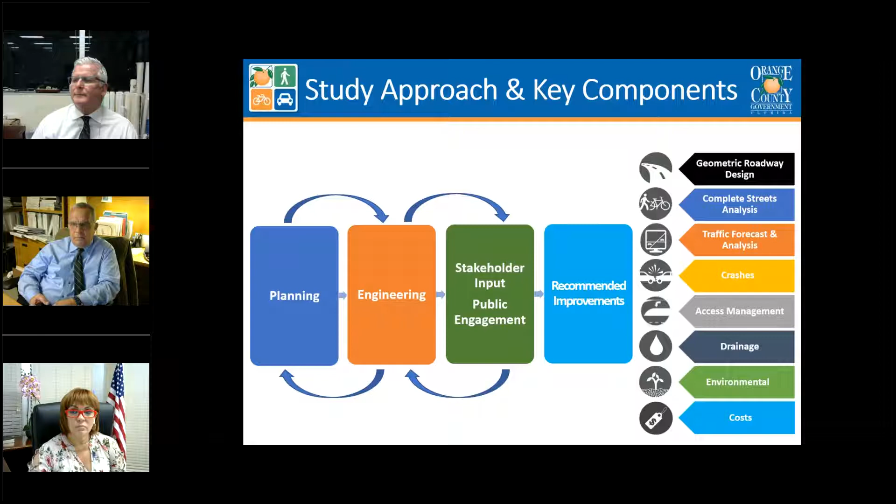The development of alternatives is an iterative process that allows the input from each phase of the process to influence the other phases. The items on the right side of the screen are the engineering and analysis factors that are considered in the study process. Public involvement and input are important aspects of all steps of the project development process.

I'd like to now give an overview of the existing conditions along the project. The items listed on the screen will be addressed, from roadway geometry to crash analysis.

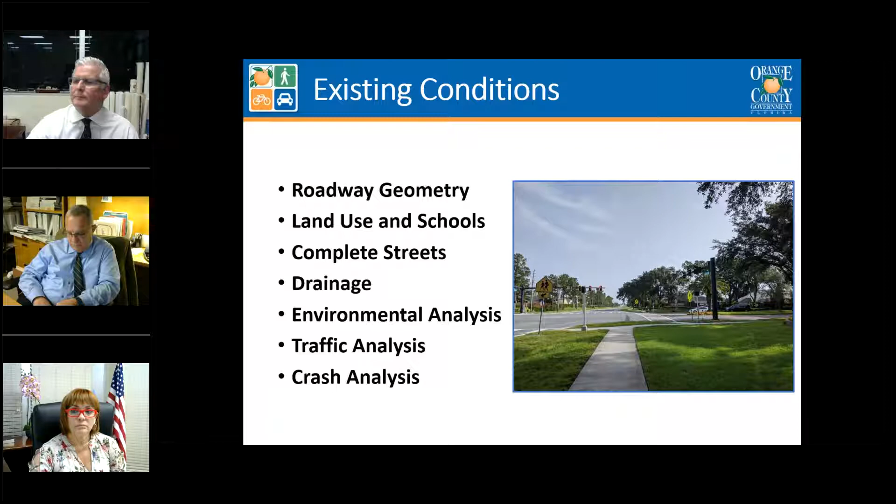Currently, the roadway is a 2-lane, undivided urban roadway with curb and gutter. It is relatively flat, except for the bridge over State Road 408. Turn lanes are provided at most intersections. Near the north end of the project, approaching State Road 50, the roadway widens to 4 lanes. The speed limit is 40 miles per hour for the entire project length.

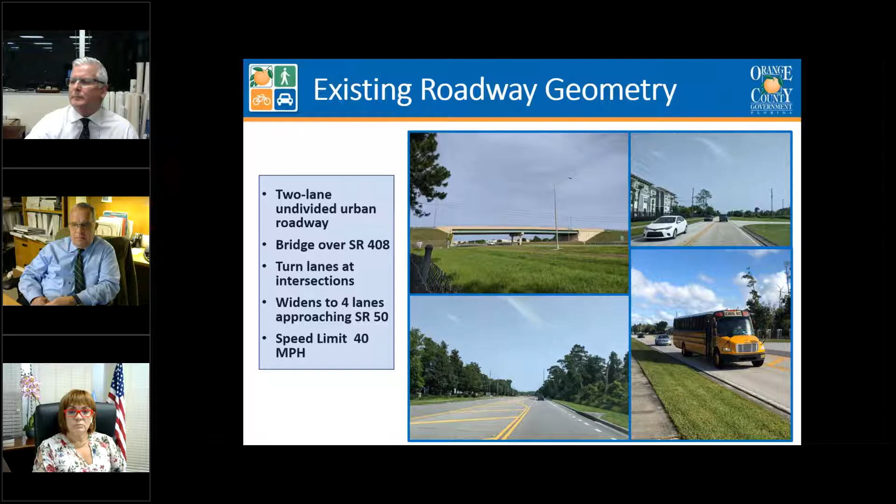Land adjacent to the project is mostly developed, primarily with single-family homes and apartment complexes. There are 2 schools, Waterford Elementary School and Discovery Middle School, located adjacent to the Lake Underhill Road intersection. There are also commercial uses and 3 churches within the project limits.

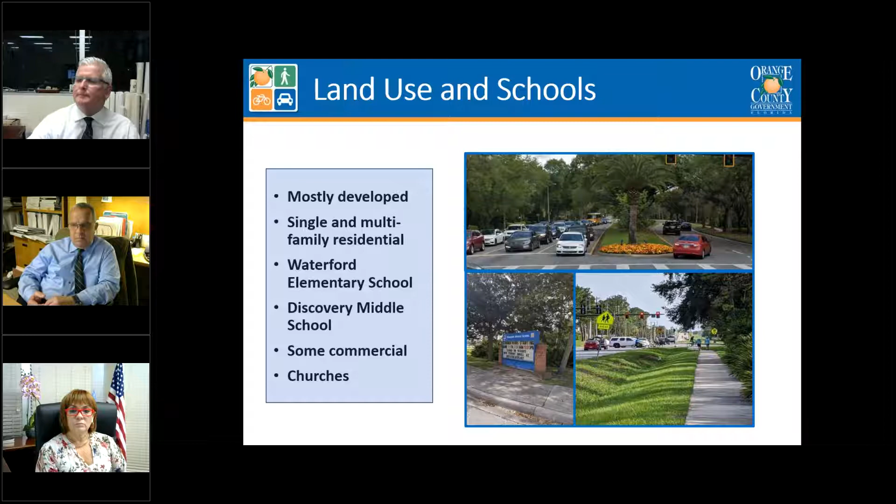A complete street is a street for everyone. It is designed to enable safe access for all users, including pedestrians, bicyclists, motorists, and transit riders of all ages and abilities. Along the project corridor, continuous sidewalk is provided along the west side of the road for pedestrians.

However, sidewalk on the east side is only provided from Waterford Lakes Parkway to Woodbury Cove Drive. Facilities for bicycles are not currently provided, except at the north end of the project where bike lanes currently exist approaching State Road 50. Lynx has 2 bus lines that travel along Woodbury Road between Waterford Lakes Parkway and State Road 50. They are Link 320, the Avalon Park School Connector, which has a stop at Waterford Lakes Parkway, and Neighbor Link 621, which is a flex service route providing curb-to-curb service to Bithlo and Wedgefield.

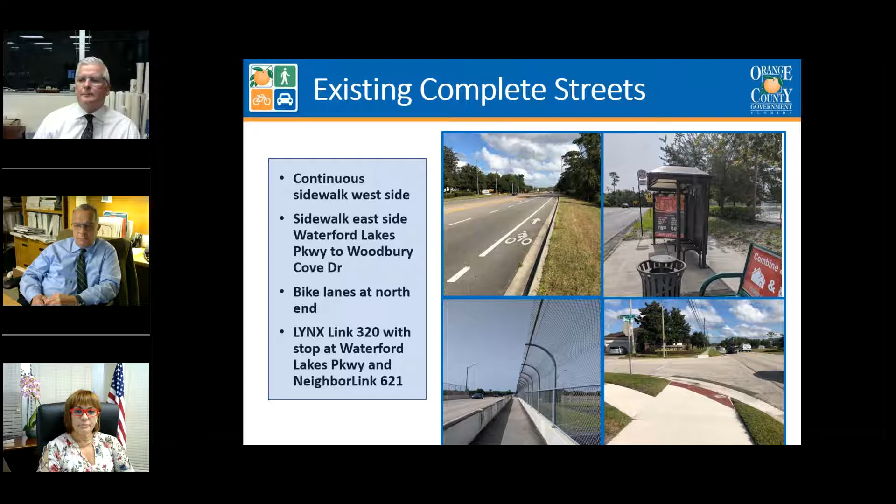The project is located within the Econlockhatchee drainage basin, and water flows east toward the Econlockhatchee River. The project includes 7 primary drainage basins. Treatment and attenuation for drainage from Woodbury Road and adjacent subdivisions is provided through joint-use ponds. Woodbury Road also has a concrete box culvert for an Orange County canal that crosses under Woodbury Road.

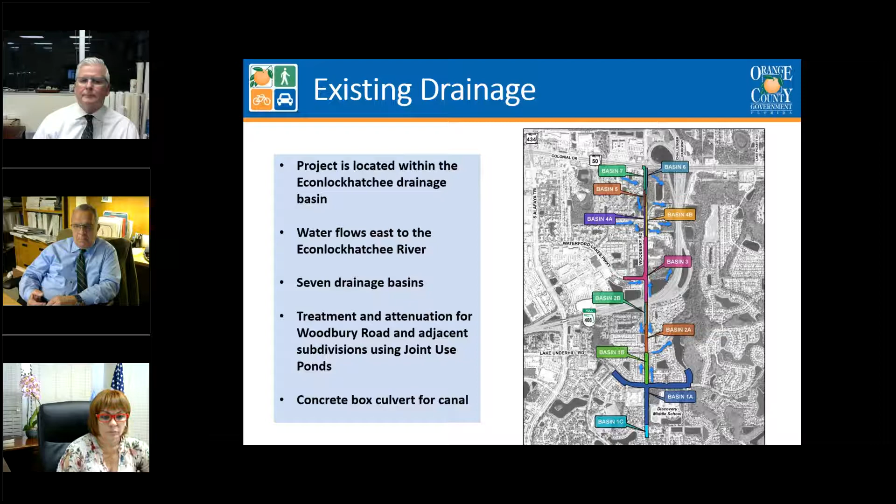The floodplain map shows that the 100-year floodplain touches Woodbury Road just south and east of the Lake Underhill Road intersection, and in the area of the necessary expansion of Pond RET1. The rest of the project is located outside the 100-year floodplain.

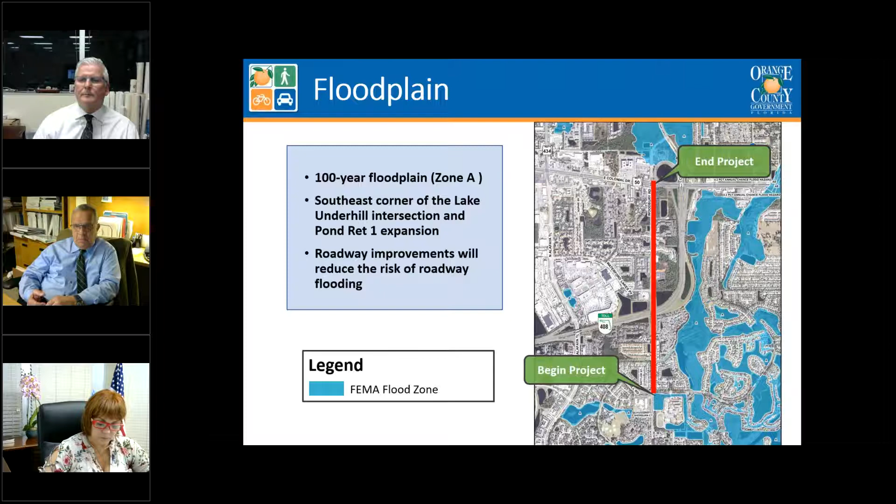An environmental analysis has been conducted for the Woodbury Road corridor. It identified 6 wetland systems and 10 other surface waters within the project corridor. Although there are consultation areas for 3 species within the project limits, the Florida scrub jay, the red-cockaded woodpecker, and Audubon's crested caracara, they are not anticipated to be found within the corridor.

Wading birds such as the wood stork, roseate spoonbill, tricolored heron, and the little blue heron, as well as the American alligator, are protected wildlife species that have the potential for being observed within or immediately adjacent to the project. No protected species or significant habitat were identified during site reviews. Wildlife crossings are not proposed due to the existing development and lack of undeveloped habitat along both sides of Woodbury Road. The project was reviewed for cultural resources and no historic buildings or archaeological sites were identified.

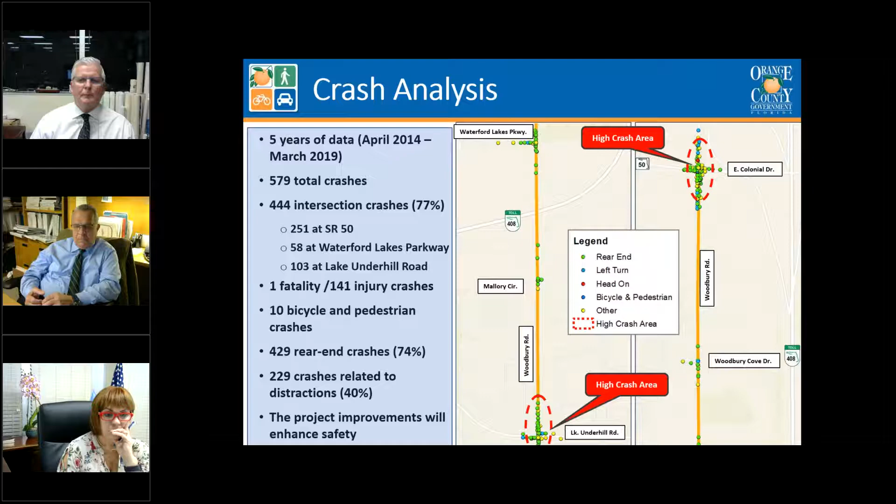The existing traffic volumes along Woodbury Road range from 11,900 vehicles per day south of Lake Underhill Road to 21,000 vehicles per day south of State Road 50. This results in a level of service F, which is failing within the entire project limits. The county standard is a level of service E.

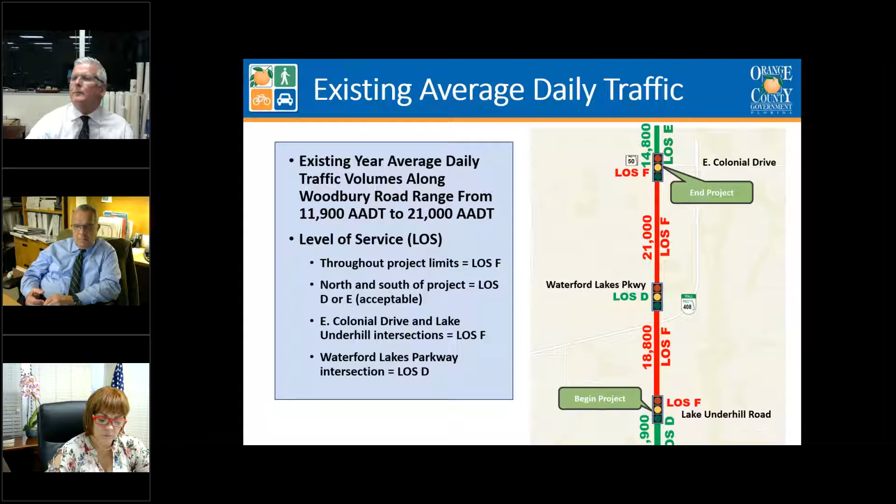The design year 2047 traffic is projected to range from 19,000 vehicles per day south of Lake Underhill Road to 28,700 vehicles per day south of State Road 50. If Woodbury Road is not widened to 4 lanes, both the roadway and all intersections will fail in the design year. Therefore, Woodbury Road needs to be widened to provide needed capacity.

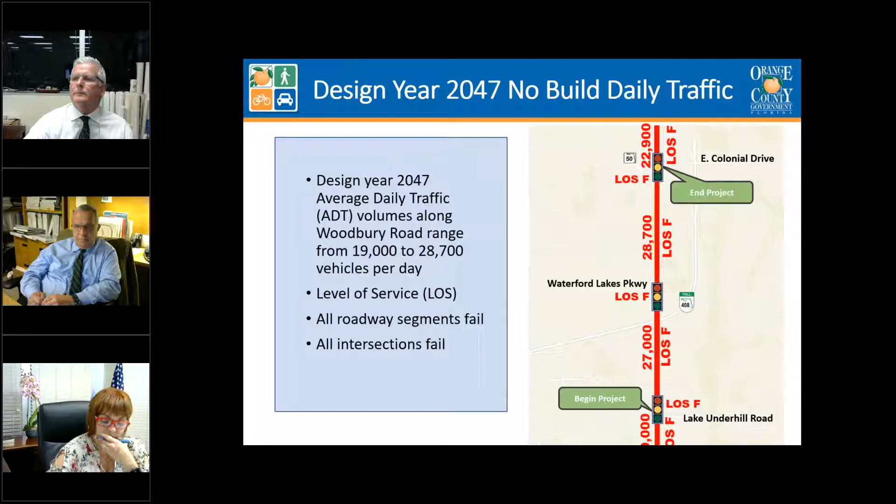We evaluated several alternatives to address the traffic and safety issues on the project. In addition to the no build or do nothing option, we considered minor transportation systems management and operation improvements. The no build and the option to make minor operations improvements will not satisfy the future traffic needs along Woodbury Road. Therefore, we evaluated 3 4-lane widening build alternatives.

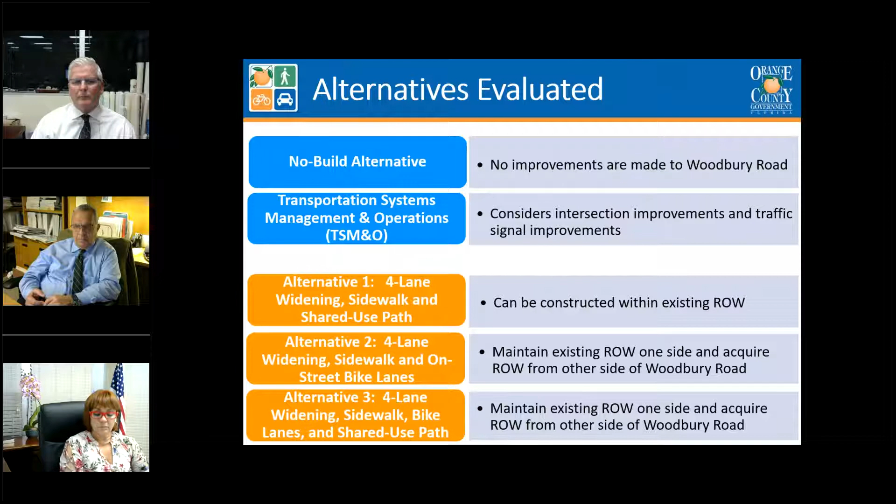Build alternative 1 includes a sidewalk and shared use path, but no on-street bike lanes. Alternative 2 includes sidewalks and on-street bike lanes. And alternative 3 includes everything: a sidewalk on one side, a shared use path on the other side, and on-street bike lanes.

We did a survey, and now I'll give you an overview of the results of the survey that was offered during the first public meeting. Detailed results are available on the project website.

Starting with accommodations for people riding bikes, the survey results showed that people generally feel unsafe riding a bike along Woodbury Road. People also much preferred bikes sharing an off-road path with pedestrians than having bicyclists riding in the on-street bike lane. When asked what would make you feel safer riding a bike along Woodbury Road, the top 2 answers were having bicycles separated on a path and having a shared use path. Better roadway lighting was the third selected option.

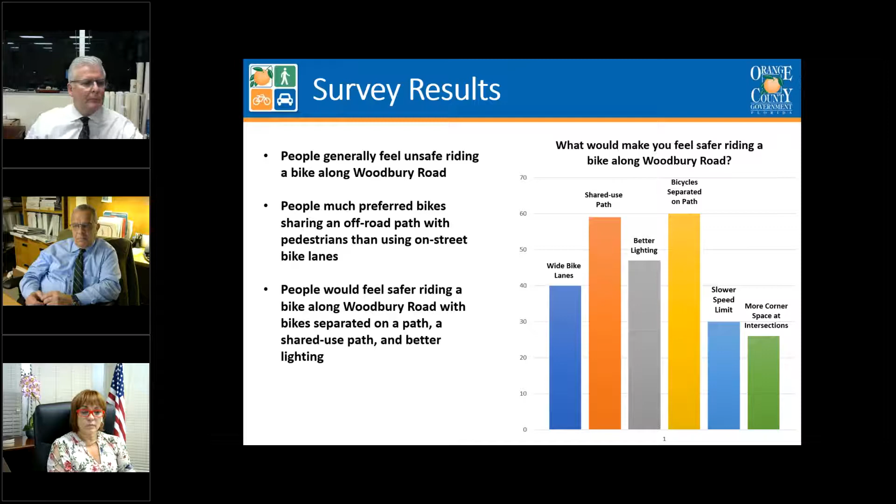For those walking, the survey indicated people feel more safe walking than they do biking along Woodbury Road. They favored more pedestrian safety features at the Lake Underhill Road intersection. And when asked what would make you feel safer walking along Woodbury Road, wider sidewalks, better lighting, and a shared use path were the top 3 responses.

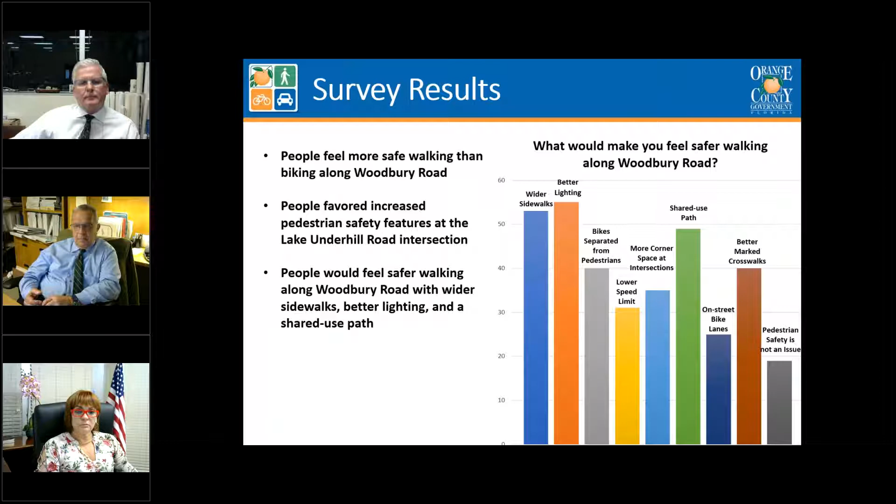For drivers, the survey results showed that people are experiencing traffic congestion in both the morning and afternoon peak periods. And people think that adding roadway lanes, adding turn lanes at intersections, and improving signal timing would help to relieve traffic. The top 2 responses to the question on what could be done to improve safety on Woodbury Road are adding turn lanes at intersections and adding lanes and a raised median.

Most people think the current speed limit of 40 miles per hour is just right, and most people strongly prefer that a median be constructed to control access.

And lastly, each of the 3 build alternatives plus the no build alternative were rated by survey takers. Alternative 1, the preferred alternative, had the highest average rating of all alternatives. Alternative 1 had a wide sidewalk on one side of the road and a shared use path on the other. Alternative 3, which had a wide sidewalk, a shared use path, and bike lanes, was the second ranked alternative. The alternative with sidewalks and wide bike lanes, no shared use path, was ranked 3rd, and the no build alternative was ranked last.

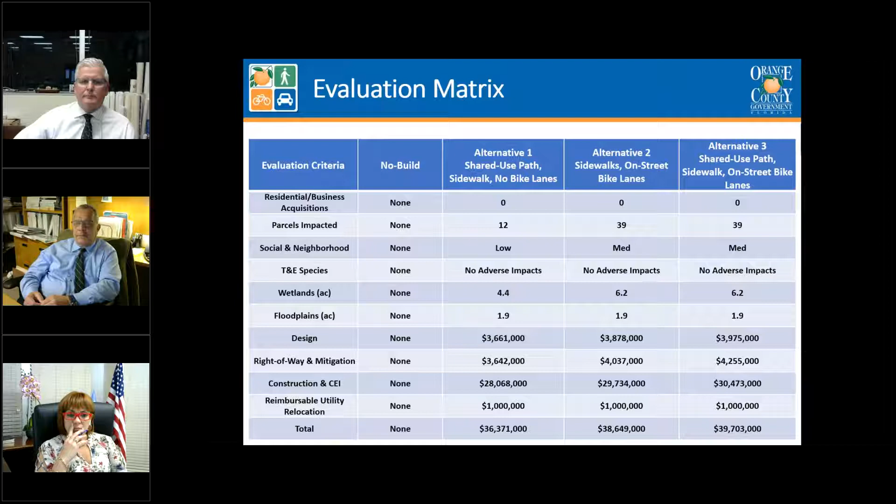Impacts and cost for the no build and 3 build alternatives were determined. Alternative 1 is the preferred alternative. It has the lowest overall cost and impacts the fewest number of residents and business parcels, while still providing needed capacity and multimodal features for pedestrians and bicyclists.

The preferred alternative consists of 4 11-foot travel lanes separated by a 15.5-foot median, a 6-foot sidewalk on one side of the road, and a 10-foot shared use path on the other.

This alternative can be constructed within existing right-of-way except near the Lake Underhill Road and State Road 50 intersections, and requires the least right-of-way of all three build alternatives. It improves mobility for people walking and biking compared to existing conditions, and it minimizes stormwater runoff and the need for additional ponds, and has the lowest construction cost of the three build alternatives.

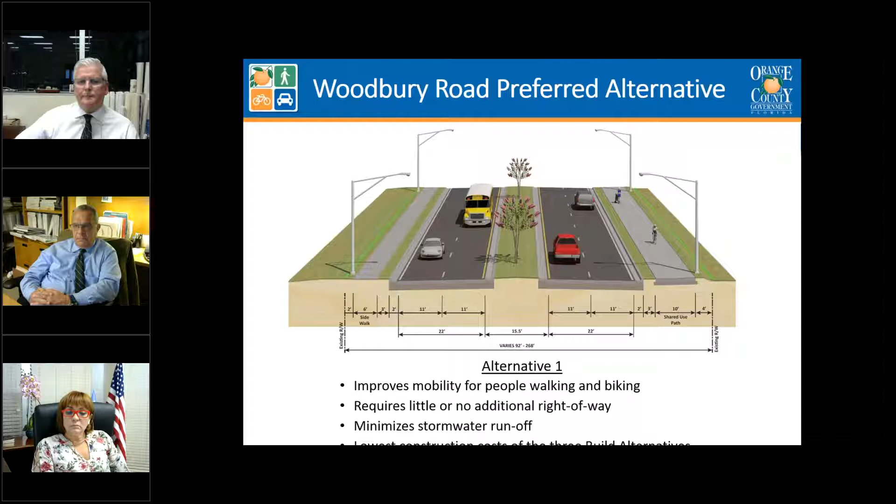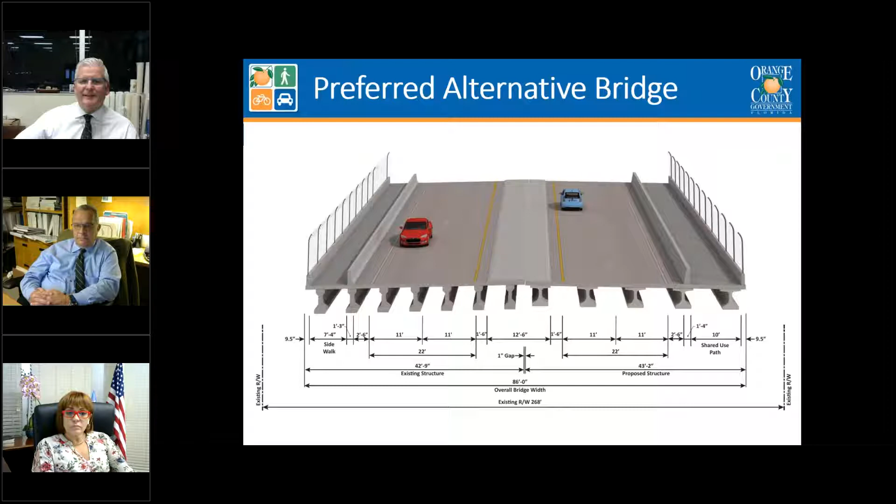We just briefly saw the bridge there. We'll also be widening the bridge. This is what the bridge over State Road 408 would look like with the preferred alternative.

This is what the improved roadway would look like just north of the Lake Underhill Road intersection, looking south at the intersection.

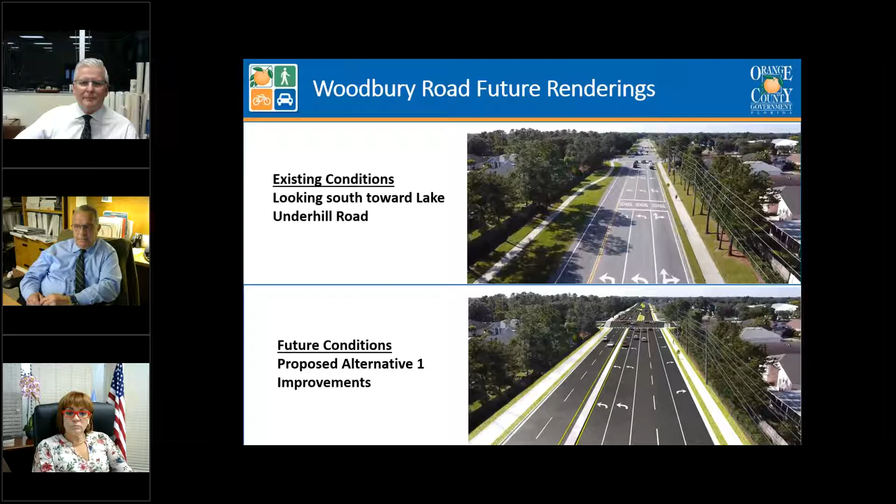Here's another view of what the improved Woodbury Road would look like north of Waterford Lakes Parkway, looking north.

The proposed improvements at the intersection of Woodbury Road and Lake Underhill Road are a balancing act to provide the capacity that is needed to serve the high volumes of traffic that travel through this intersection with a high number of students that cross this intersection on their way to school each day.

Proposed intersection capacity improvements include adding right turn lanes northbound, southbound, and westbound, and adding a second left turn lane for the eastbound to northbound Woodbury Road movement. Improvements also include extending turn lanes so there is sufficient room to store vehicles waiting to turn. In order to maintain safety for the many students that cross here, we also propose that the signal continue to stop vehicles in all directions to allow students to cross the intersection without any conflict from cars.

The proposed improvements at the intersection of Woodbury Road and East Colonial Drive include adding a second left turn lane and a right turn lane northbound. The traffic analysis has also identified the need for a second right turn lane on Colonial Drive for the westbound to northbound movement. This improvement will not be constructed as part of this project, but will be recommended to the Florida Department of Transportation since Colonial Drive is a state road.

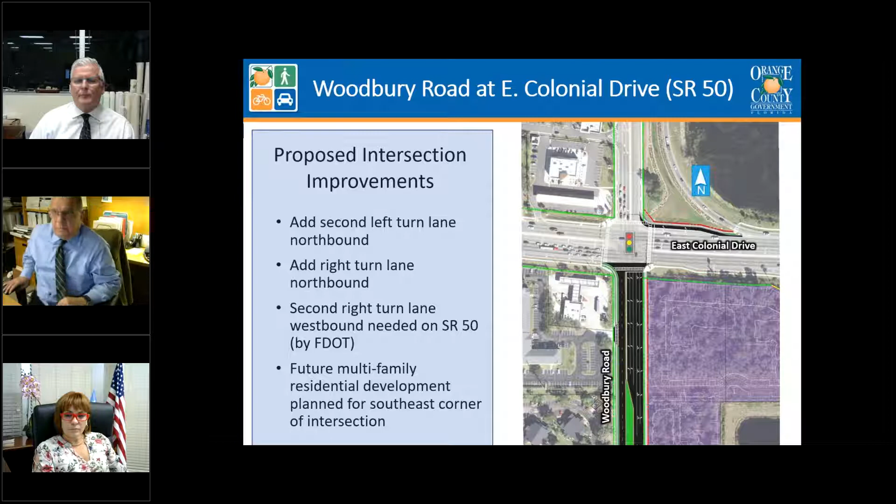The slide also shows a proposed multifamily residential development that is planned for the southeast corner of the intersection. Two options are proposed to address the proposed planned development. The preferred alternative, management concept 1A, in the area south of East Colonial Drive is shown here and includes a northbound directional median opening at the Polos East Apartments.

A second option is being presented for this area that includes a full median opening at the unnamed road where a traffic signal would be added. This option is only viable if traffic signal warrants justify the installation of a traffic signal at this location. The northbound directional median opening for the Polos East Apartments would also be included with this concept.

Public engagement is a very important part of the project. Your opinions and thoughts help formulate the best solution. We utilize newsletters, a project website, meetings such as this, and smaller groups or individual meetings as requested. Public hearings will also be heard before the local planning agency and Board of County Commissioners.

In hearing about the corridor alternatives and the potential need for additional right-of-way, you might ask, how do I know if my property is impacted? Well, first, the county reviews citizen feedback received from the public meetings and other methods like the website comment form and survey form given in the first public meeting.

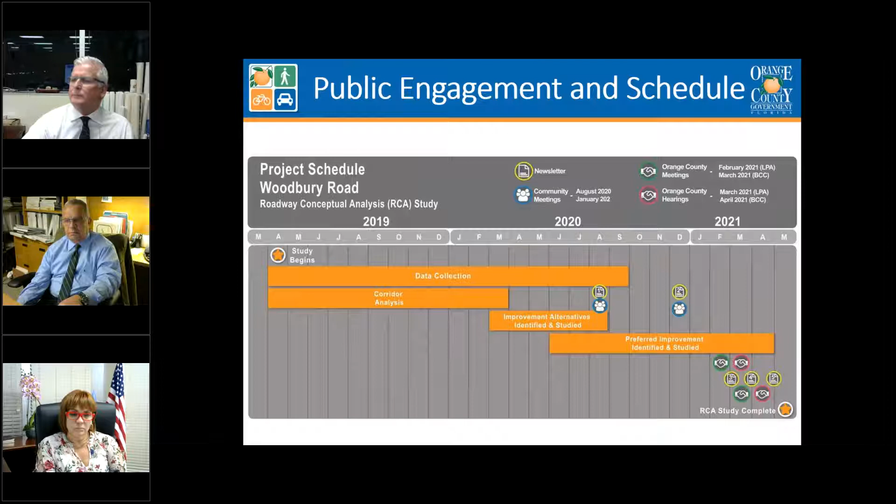The project began in April 2019 and is expected to be completed by May of next year. We held the first community meeting in August of this year, and tonight is the second community meeting. We will then bring the recommendations to the LPA and Board of County Commissioners for final approval at meetings over the next few months.

My contact information and the contact information of David Dangle, the consultant project manager, are both shown here, along with the website address.

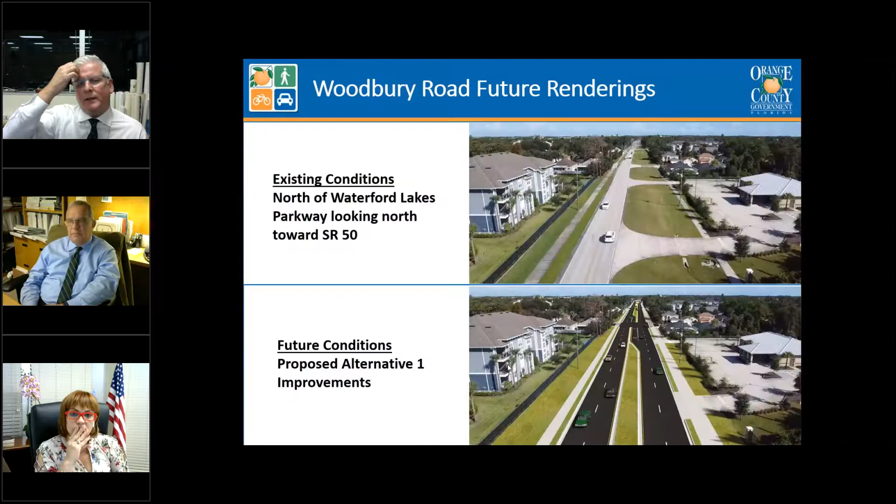Maybe you can bring back the slide with the pond sites. Yeah, I can just say that the main pond in the middle of Waterford Cove is not going to be affected. The one to the east side, along the back of the neighborhood next to the wetland, that's the one we are looking to expand slightly into the wetland because of the additional lanes at the Lake Underhill Woodbury Road intersection. So there will be some changes on the backside of the cove. Of course, we're working with all the permitting agencies. We'll have scientists and biologists looking at this throughout the design and construction, and we take every precaution necessary.

Will there be markings in the shared use path to help prevent issues between bike riders and pedestrians? We typically do not stripe a shared use path.

If we see that there's an issue, typically there'll be a separator marker, pavement marker, at intersections to help channelize the flow both northbound and southbound. But we're going to monitor that after construction, and continue to monitor it. I'm sure we'll get phone calls if there are issues - the Commissioner's office will get phone calls, emails - so we'll monitor that and make sure. But there's plenty of things we can do if something like that begins to occur.

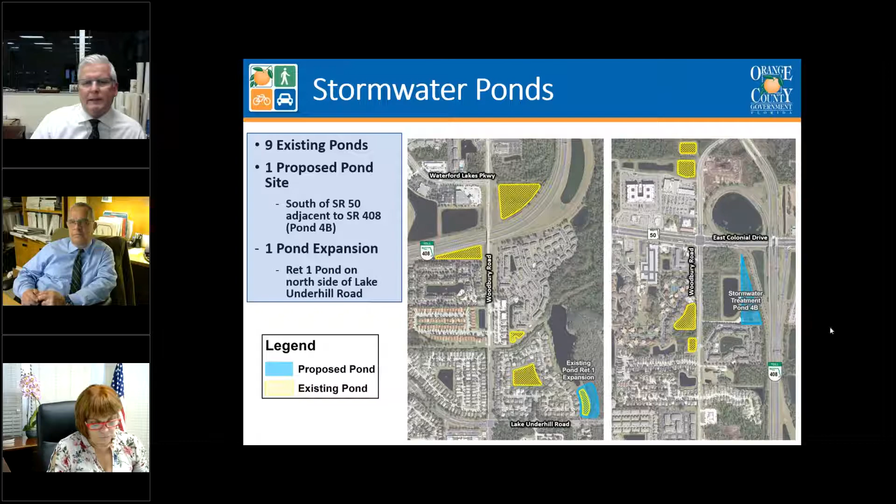We don't really have a graphic of the entire project limit, but a majority of the right-of-way needed is right at the Lake Underhill Road intersection. And then there is a little bit at the State Road 50 intersection that will be from the east side of the road where that planned development is coming in. There's not really a need for additional right-of-way north of Lake Underhill Road or south of State Road 50.

We were very fortunate with this project that back in the 90s, the leadership at the county, when Huckleberry was being developed and Waterford and all of these projects along here, that additional road right-of-way was provided through development exaction. So by and large, the main line right-of-way for the road has been in place since then, and now we're benefiting greatly by coming back and utilizing that land. We did show a couple of alternatives that would have to exceed that, but I think the one that was recommended is really the sweet spot for this project.

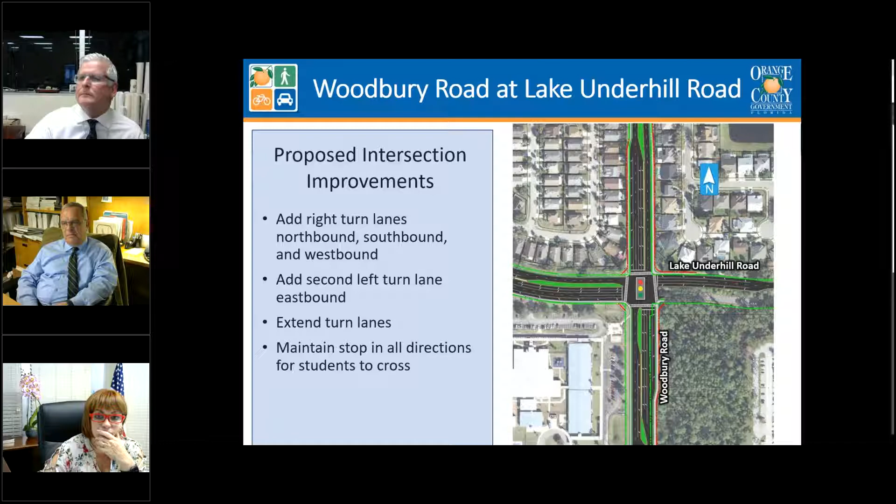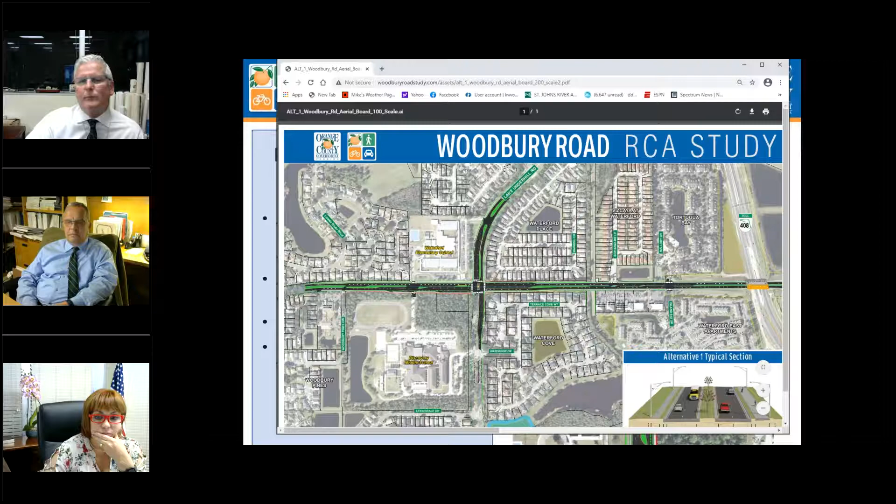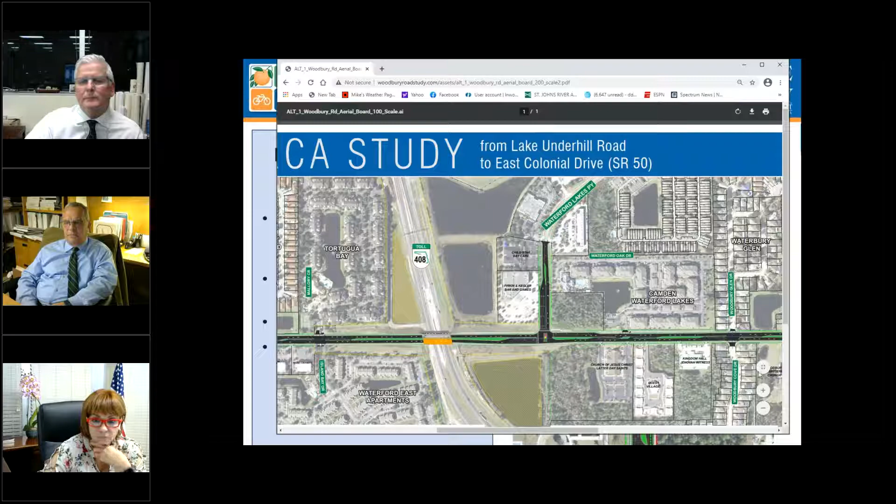Okay, let me see, I've got it pulled up. Yep, we can see it. I just need to figure out how I can scroll over and zoom in. So Quest Village is kind of above the bridge typical section, Brian.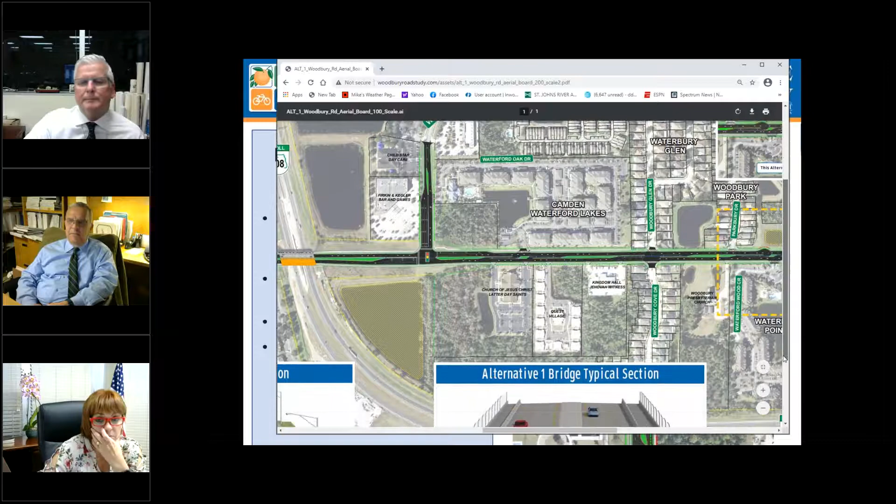Is that helping? Can you see that? Yeah, that's helping.

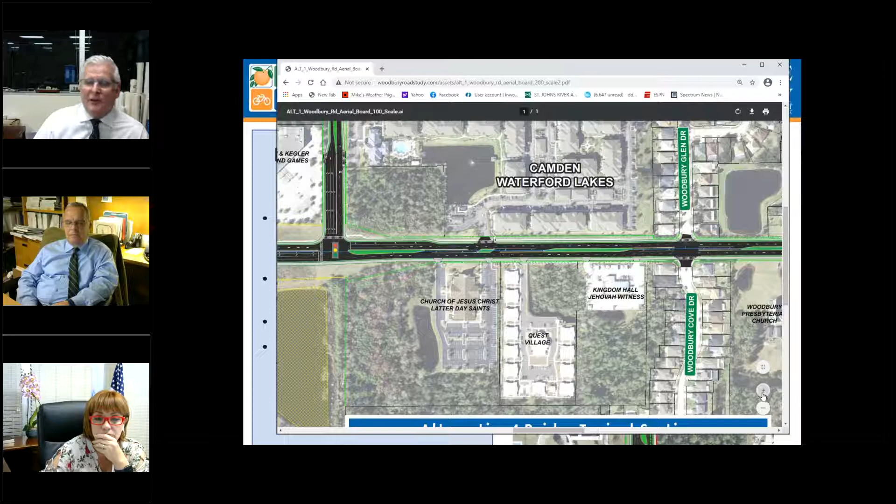Mid-block crossings need to be evaluated on a case-by-case basis. You really need to be able to demonstrate that you have a good solid stream of pedestrians and bicyclists crossing at those locations. We will monitor that post-construction to see if travel patterns change, and you can be our eyes out on the road as well.

Let us know if you're seeing an increase in that kind of crossing. Just south, there'll be a traffic signal, which will also offer the ability to cross the road. So for that one, this is going to be a monitoring issue. And of course, we're going to complete the pedestrian paths on both the east side and west side for the entire length of the project.

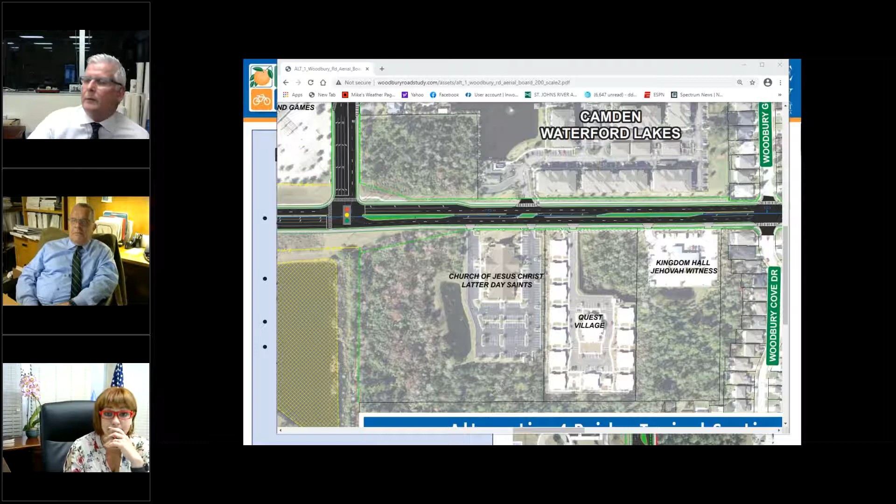The last question was, will any type of privacy barrier be installed for our closest buildings to Woodbury Road? The county has a screen wall policy, however it is focused on platted subdivisions. So the answer would be no in the case of Quest Village. That would not apply.

We have another question regarding the survey from the previous meeting. Will you consider sending a secondary survey for those that didn't get a chance to attend or participate? We can take your input through the project website. There is a place on the website for you to provide more information and comments.

Do we have the survey posted, or will we have the survey posted, David? The survey is posted. So you can see the survey, you can see the questions, you can see the direction of questioning that we had out there, and you can provide your input and comments in that manner.

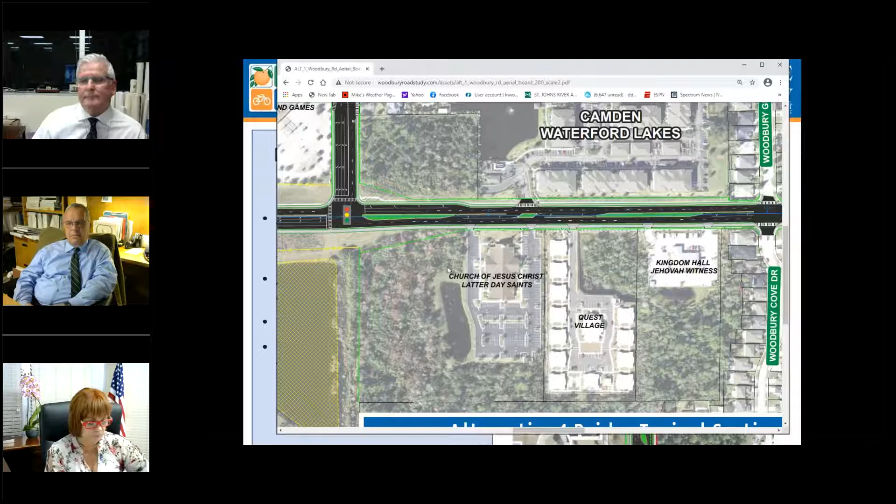What will be the number of lanes in each direction at Woodbury and Lake Underhill? Please include crossover and turn lanes. Okay, can you zoom in there, Dave?

North is to the right in this case, so you'll have 2 travel lanes in all directions. Southbound, you'll have a dedicated right turn lane and 2 dedicated left turn lanes. Same way northbound, 2 lanes through, 2 lanes left turn, 1 lane right turn. Eastbound, pretty much the same thing, 2 lanes through, 1 right turn lane, 2 left turn lanes.

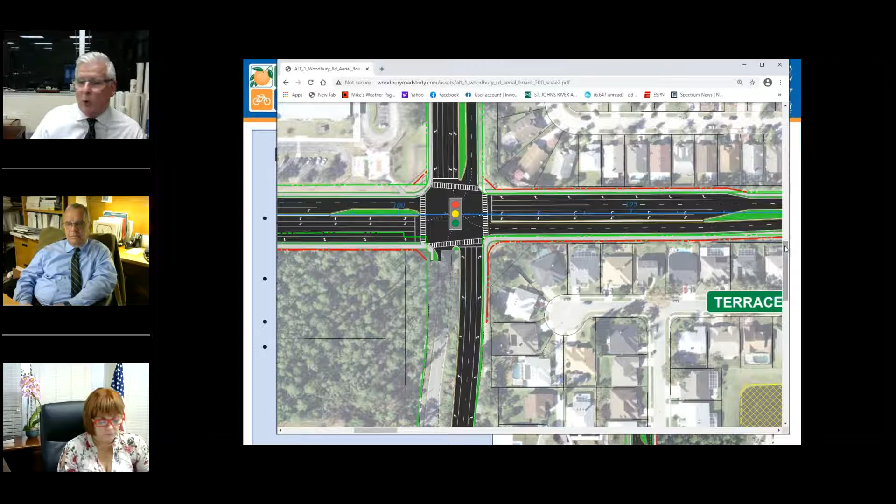In the other direction, we don't have a dual left. We have a single left, a single right, and 2 throughs. And that's all based off of the projections from the traffic analysis conducted for this project. I'd like to note that traffic analysis was pre-COVID, so we had some good information to go off of.

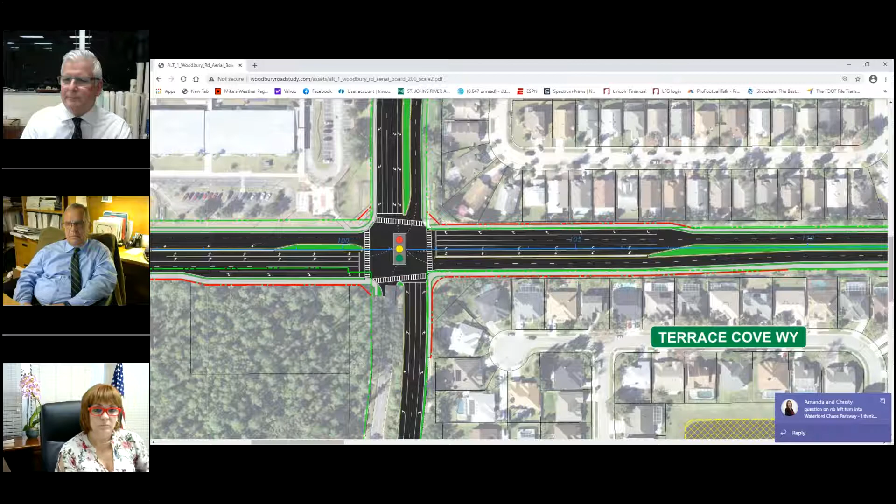Will the existing underground utilities have to be moved? This is the area behind Waterford Cove. These utilities were installed when the county installed the reclaimed water pipe several years back. Dave, you want to take that?

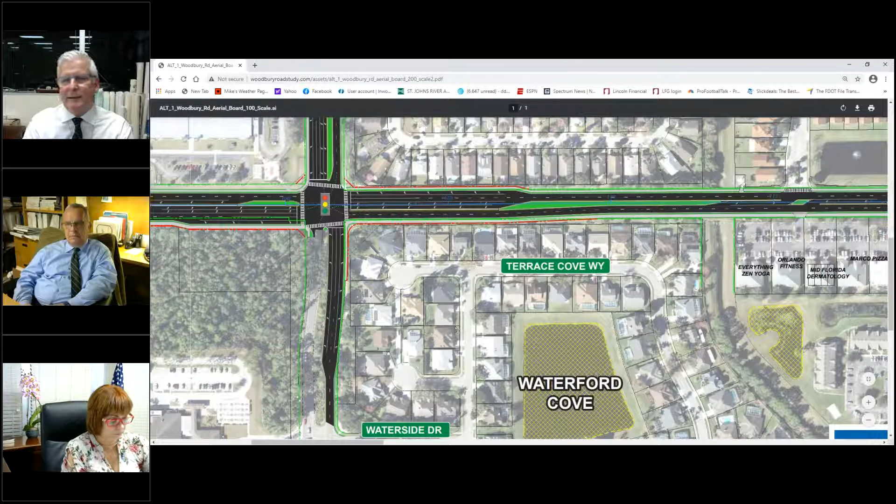I'm not specifically sure where they're talking about behind Waterford Cove. There is the potential for some utility conflicts within the existing road right-of-way, but that kind of detail on whether they will need to be relocated or not will be determined during the design phase that Renzo mentioned earlier, where you get into a lot more details at that point. I'm not sure if that specifically answers the question about Waterford Cove.

That was the whole exercise the first time around. But as we go into the design phase, where we have the vertical information for all the utilities and for all of our pipes that are going to be needed for drainage, we'll know for sure then. But we're pretty confident right now.

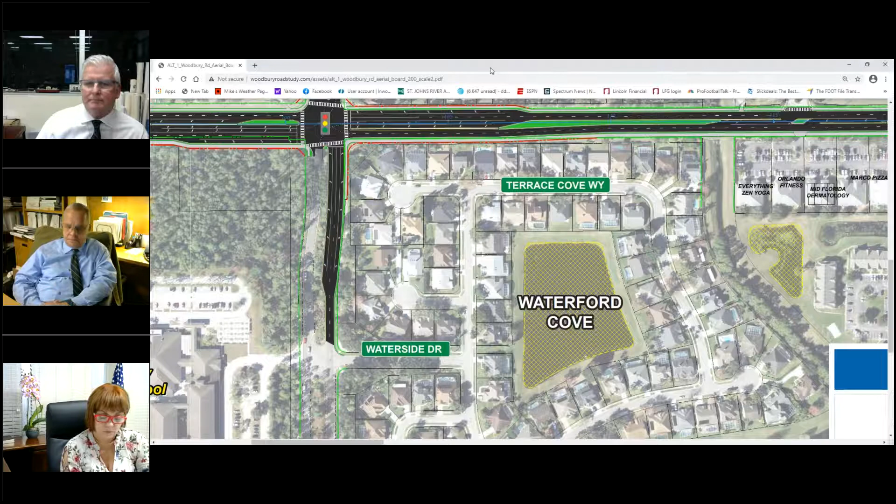One of the most important things is minimizing impact, particularly to residential properties. And it does minimize the impact better than alternative 2 or alternative 3. That was a significant consideration.

Just to add to that, I want to assure the public and those participating in this meeting that the local planning agency, also known as the LPA, affords you the ability to participate and voice your preferences and concerns regarding this project. There'll be a second opportunity during the Board of County Commissioners presentation. What you're seeing this evening is the recommendation that staff will put forward for the board's consideration and approval of this concept, so that we can move into the design phase.

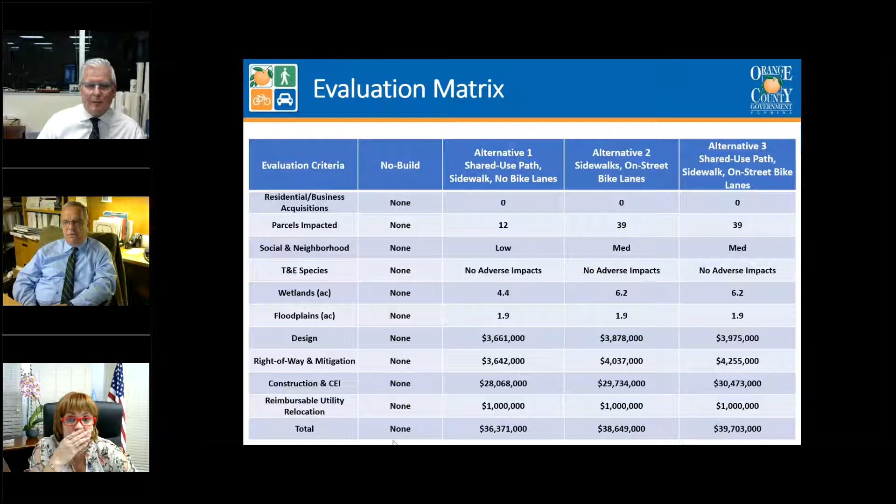I just want to make it clear that this is not your last opportunity to voice your opinion. There are two public hearings scheduled, and you are more than welcome to participate in those events. We will send a newsletter before each hearing, advertise in the newspaper for those who don't get newsletters, and place the information on the project website. Please keep in touch, and call any of the contact people, and we'll be happy to share dates and times with you.

What is the plan for Woodbury Road south of Lake Underhill, between the side entrance to Waterford Elementary and the entrance to Discovery Middle? Will two through lanes be added in addition to a right turn only lane headed south into the Eastwood neighborhood?

Brian, this is David. The graphic on the screen shows the lanes being proposed. I know we've heard concern about carrying the two lanes south of the Lake Underhill Road intersection, but they're needed to help that intersection operate efficiently. If we have two through lanes coming south to Lake Underhill Road, we can't just get rid of one and only have one continue through to the south. The intersection won't function at a high enough level of service in the future. Same way heading northbound, we need to establish the second northbound through lane in addition to the other turn lanes to help the intersection operate efficiently.

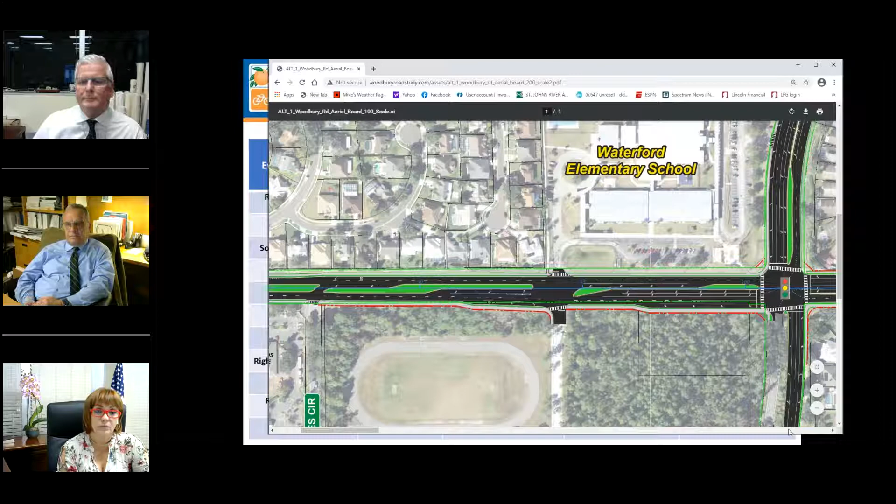We've also had a couple of meetings with the school board staff, and they requested some additional turn lanes and lengthening of existing turn lanes shown on the concept. You can see there's a new northbound right turn lane into Discovery Middle School. The southbound left on Woodbury into Discovery Middle School is about as long as we can make it because of the proximity to Lake Underhill Road. We've also included a northbound left into the Waterford Elementary School intersection off of Woodbury Road.

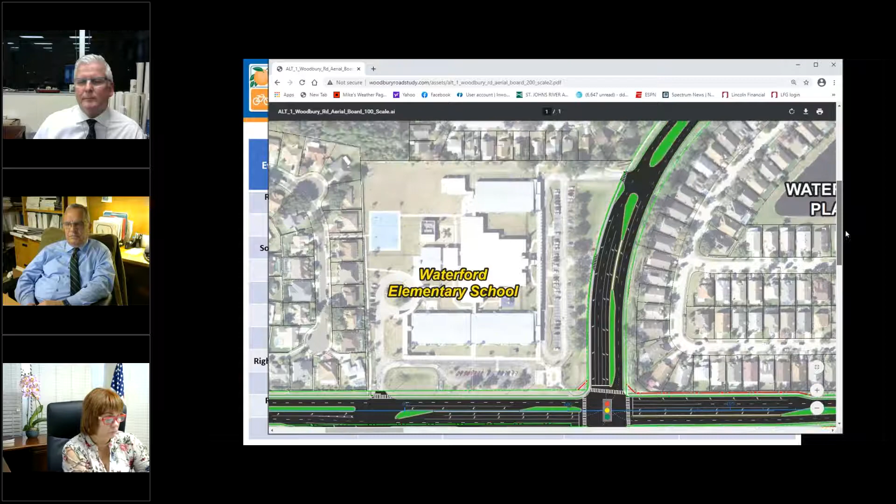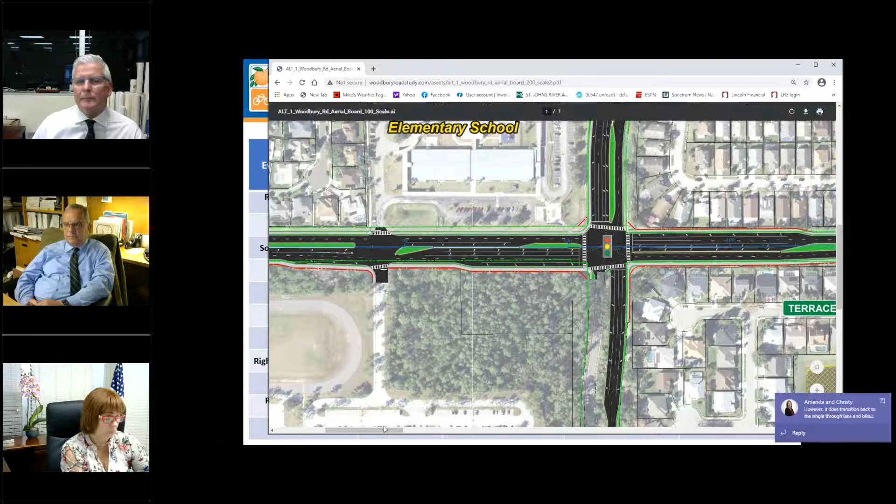And then on Lake Underhill Road, again, we have extended the left turn lane into Waterford Elementary in that area. So that's what we've got proposed in this area. You can see that we are transitioning back to the single lane once we get far enough south of Lake Underhill Road, in each direction through this area.

David, did we cover adding turn lanes headed south into the Eastwood neighborhood? Will two through lanes be added in addition to a right-only turn lane headed south into the Eastwood neighborhood? No, we don't have any additional right turn lanes proposed. We just have the two through lanes carried through Lake Underhill heading southbound, and then the outside lane will merge so that we have a single lane once we get just past the kids' daycare in that area.

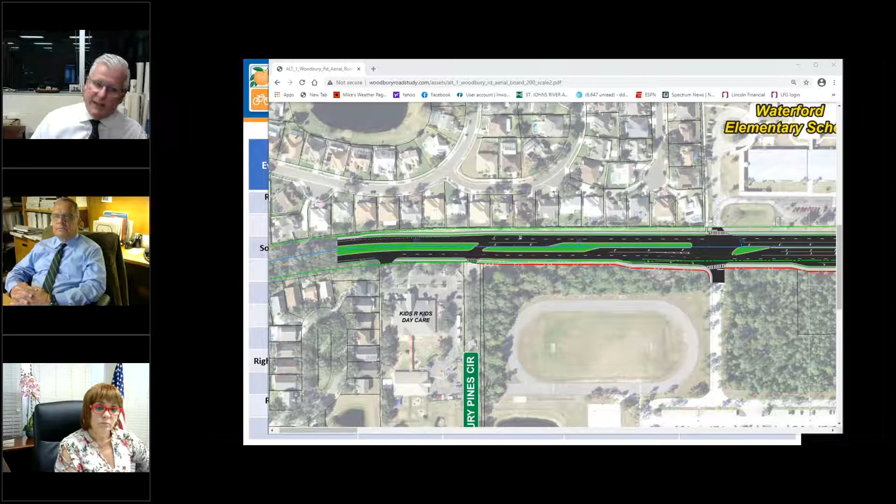We actually went further than what the scope of the project was, but in order for that intersection to function properly, like David said, we extended further than where we had anticipated to begin with.

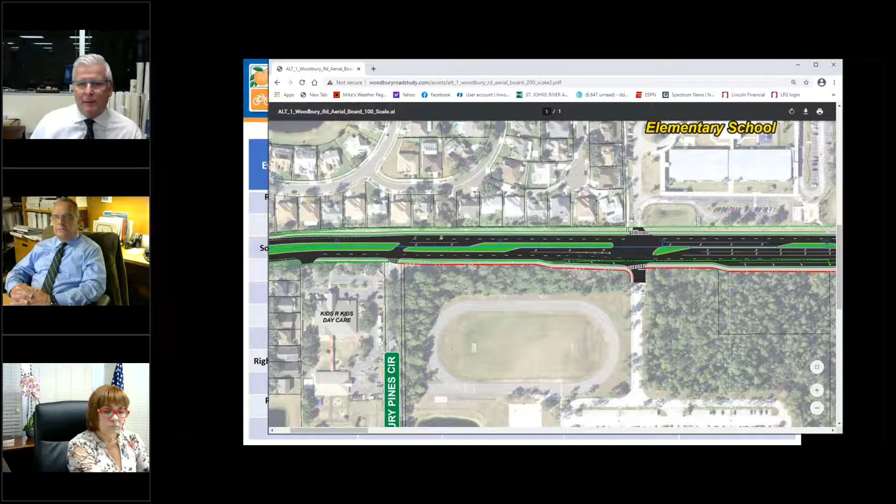I think we just answered this one again, but: where would those two straight lanes merge into one before the beginning of Eastwood near the entrance to Woodbury Pines / Kids R Kids? It's up on the screen. Pretty much that driveway is the point of transition. We developed the second northbound lane just south of Woodbury Pines Circle, heading northbound.

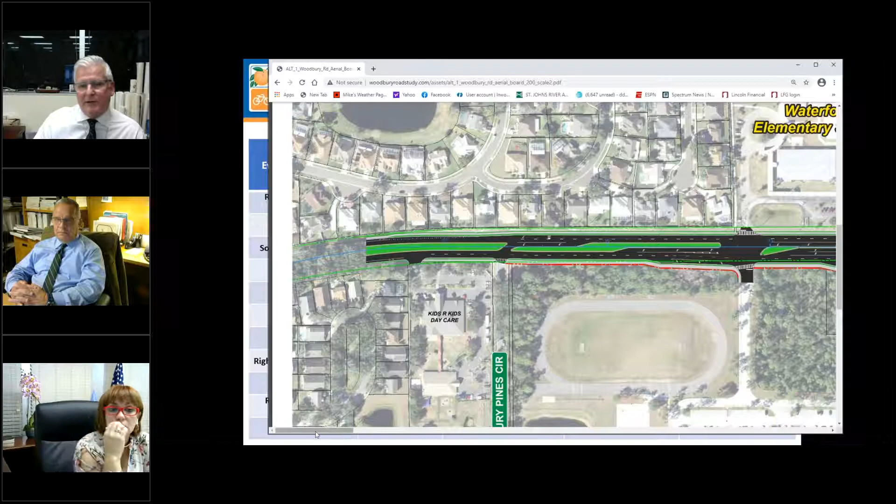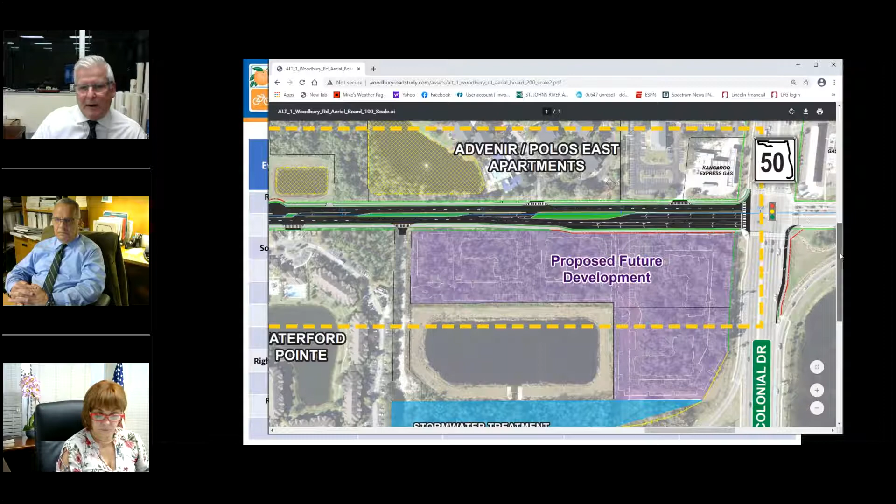Are any additional traffic lights planned? Entering Woodbury Road from side streets is already difficult. As Blanche had shown, there's an optional traffic signal at the north end of the project. There's an unnamed cul-de-sac up there that has the potential to warrant a traffic signal. So depending on those signal warrants, there might be a new traffic signal at that location.

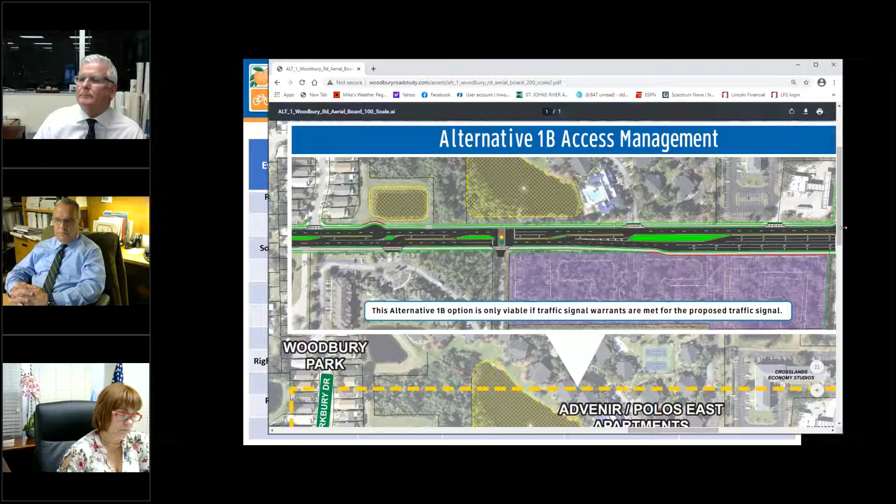Is the portion of Woodbury Road south of Lake Underhill Road considered a collector road? Let me come back to that. I'll pull up an application and follow up in this meeting. It'll take me just a couple of minutes.

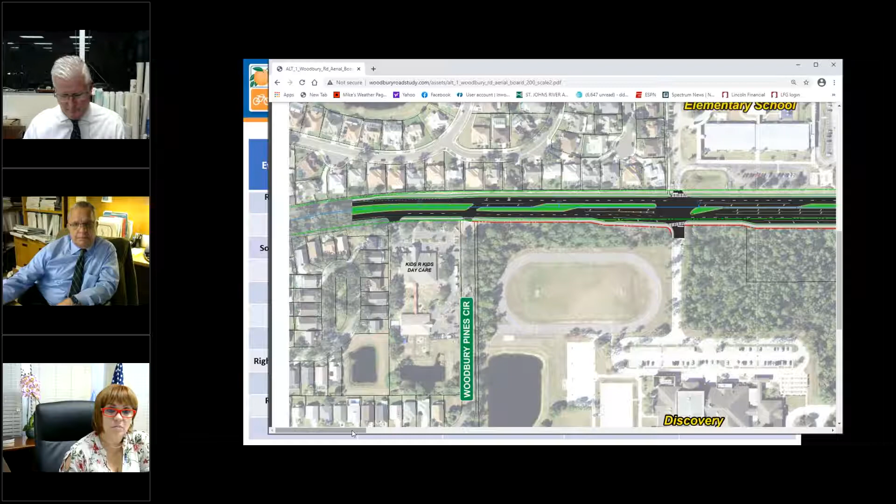Since Woodbury Road goes over State Road 408, is this in State Road 408 right of way? What role does CFX have in this? We've met with CFX, and the bridge widening is part of our road, and it will be a county project. So the passover at 408 is not the Expressway Authority's responsibility, it's our responsibility. We've coordinated, and there's sufficient right of way to do what we need to expand the bridge. So we've coordinated fairly well with them.

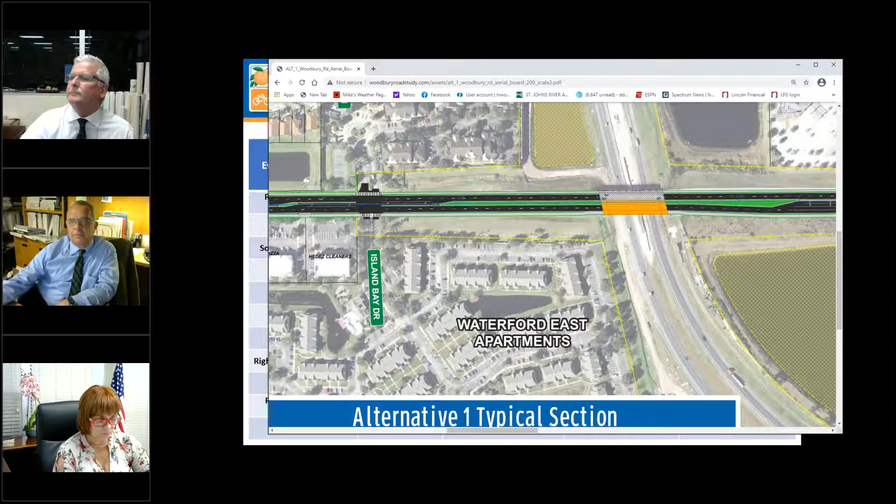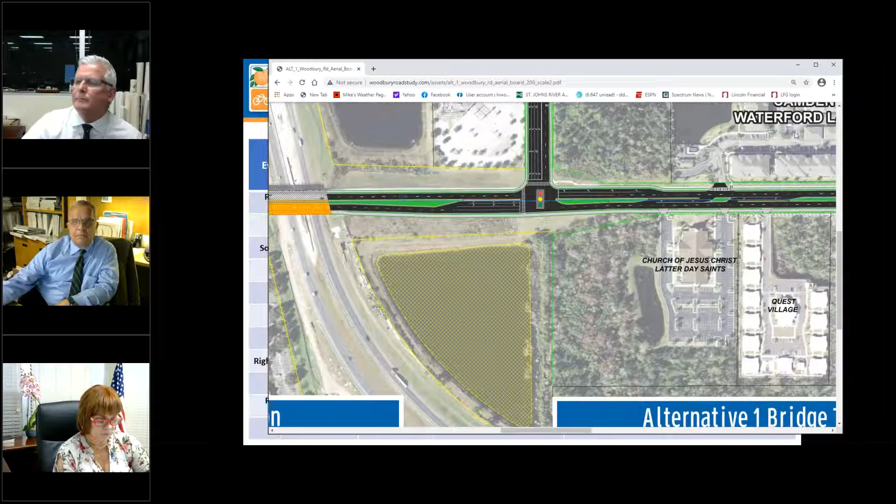Looking at the exhibit of Alternative 1 at the Woodbury Road and Waterford Lakes Parkway intersection, the northbound left turn lanes into the mall look very short. On a busy weekend, the single turn lanes that are existing will back up to the bridge over State Road 408. Consider making these turn lanes longer.

The lengths of the turn lanes were determined through the traffic study that was conducted for the project, which looked out to the year 2047. So this is what the traffic report showed would be needed to adequately make the intersection operate efficiently through the design year 2047.

Going back to the functional classification from Lake Underhill south, that's a major collector urban.

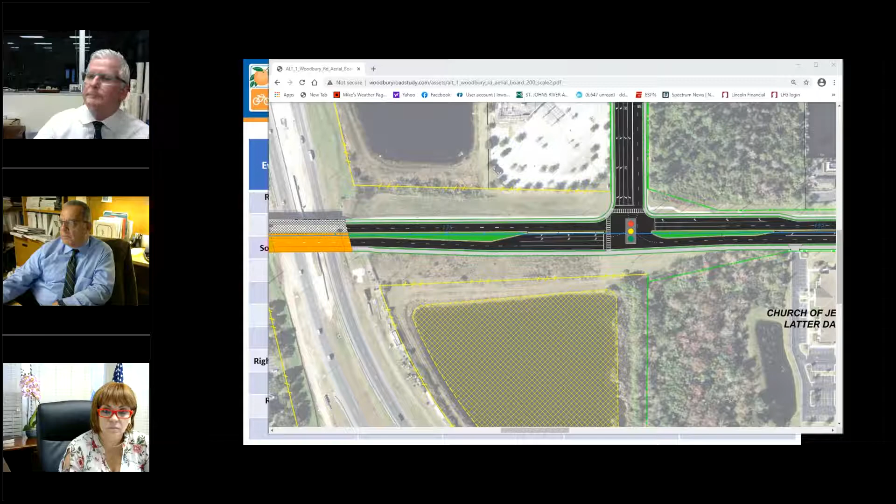The developer of the new development dedicated $600,000 to road improvement studies. How are those funds being purposed to the design of the expansion, and what effect will that have on the timetable for completing this project?

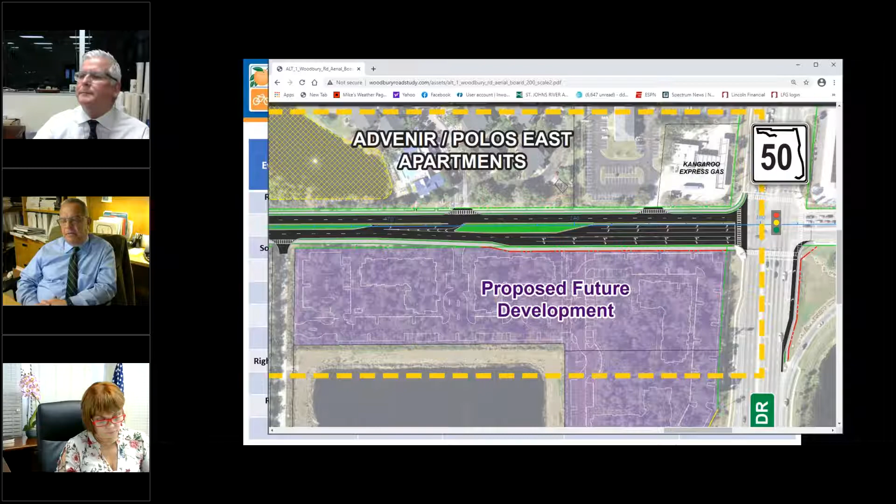I think what that is referring to is a proportionate share agreement, and that actually had to do with the dedication of right-of-way. Yes, those funds will be utilized probably during the design phase. So any proportionate share funds that were provided will be utilized during the design phase.

Is design, right-of-way, and construction funded for this study? The study is funded, and I'm happy to report that the design is also fully funded. As indicated earlier, the vast majority of the right-of-way is in place, but there will be some right-of-way acquisition that needs to take place. At this juncture, we don't have funding for the completion of right-of-way or the construction phase. So those phases will be subject to future capital improvement program allocations through the Board of County Commissioners.

Would you consider reducing the miles per hour in areas? Let me reread this. Would you consider reducing the speed limit in the area since vehicles will be much closer to residential homes?

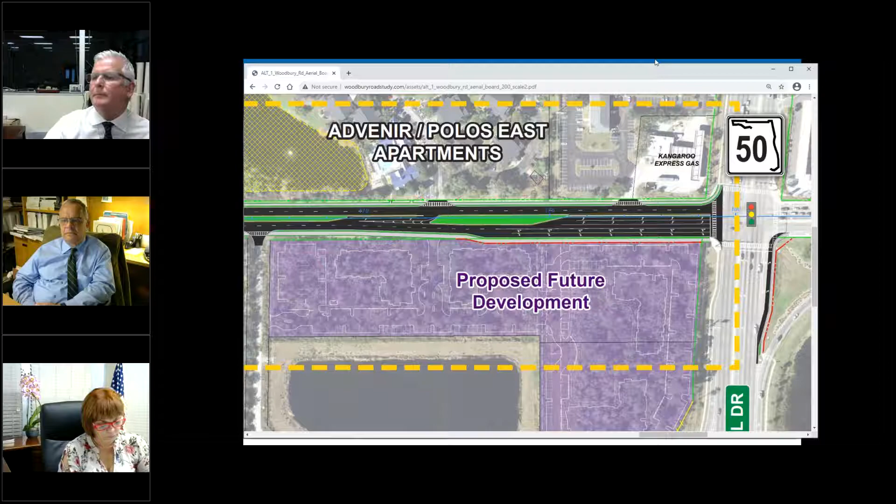Next, was construction of the proposed senior citizen apartments south of Lake Underhill considered in the design? And then the follow-up, the area where the pedestrian paths are located.

Yes, a little. In fact, I believe we had an interim project that considered that facility. We were contacted some time ago, several years back, when that was going to be constructed, and they had asked for a sidewalk to be constructed so that they could get access to the town center shopping area. So that was accommodated, and then was further reinforced with the idea of putting a multi-purpose path and crosswalks, pedestrian crossing buttons, and all of the safety enhancements that would come with this roadway project. So yes, we did it before, and we'll do it again.

How will the decision be made which side of Woodbury construction starts on? The design plans will have a maintenance of traffic plan, and we will present that to the company that wins the construction bid. It's a recommendation to that contractor. The contractor is responsible for coming up with his own plan or adopting the plan that's in the construction plans. Typically, the first thing that happens is that any kind of utilities, cable, telephone, just a myriad of utilities that are in the right of way, those get relocated first.

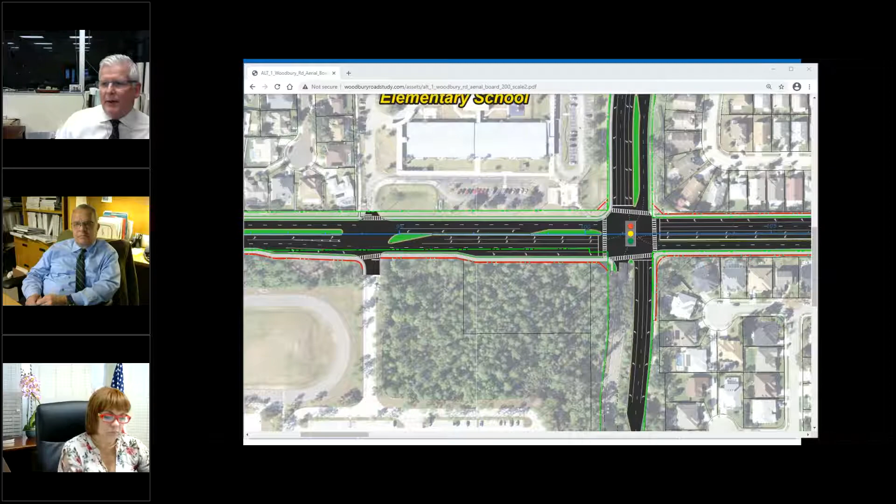We don't have any direct impacts to residential homes. You can pull back the matrix and see that there are parcels impacted, 12 parcels impacted, but no acquisition of homes.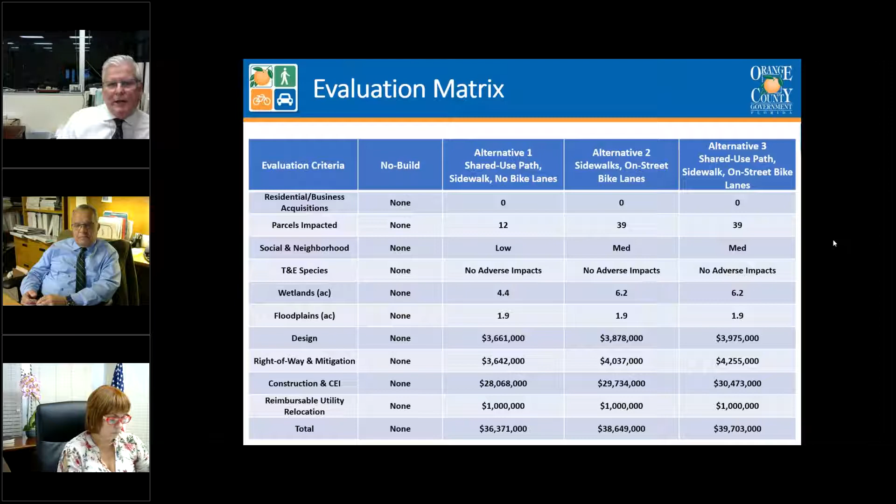The county has a right-of-way section that will work in conjunction with the design plans. The design plans will detail exactly how much property would be needed to acquire. During design, they have the vertical information that we don't have right now in this study, so we will produce right-of-way ID maps that start that process off.

In terms of compensation, that will be handled by our right-of-way section in the Orange County Real Estate Management. There are MAI independent appraisers hired to put together an offer package to whoever or whatever entity it might be, the HOA in some cases, and present that as an offer, and you have the ability to negotiate and settle the impact. So I don't have a dollar value that I think you're going to get, or the HOA is going to get. That's going to be worked out through negotiations sometime after the design, or maybe during the late stages of design.

We have two questions left. What phase are we in right now, and what are all of the phases necessary for project completion?

We're in the study phase right now. We'll be wrapping that up in the spring of next year. When funding for design becomes available, I believe it's in '21, that will go out for a design contractor. That phase usually takes about two years to complete. There's a lot of detailed information. These are very expensive projects, and we don't want any surprises when we get to the construction part, and we don't want to have to go back and purchase additional right-of-way for things that could have been missed.

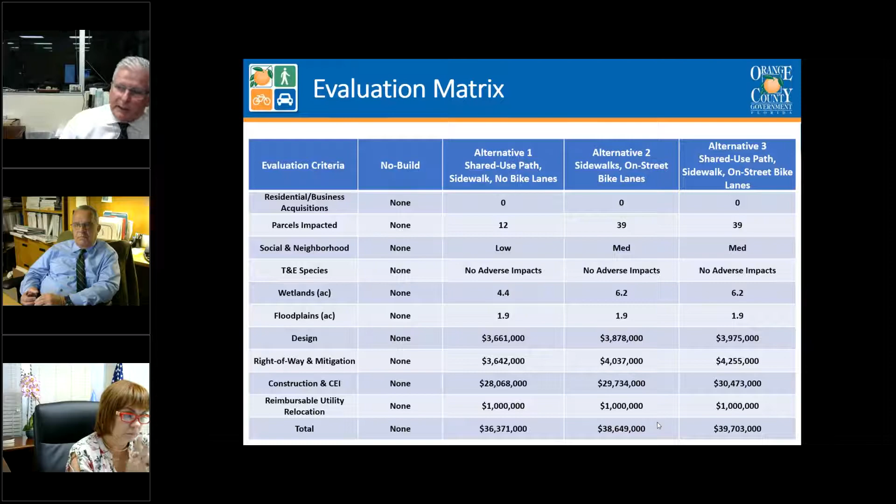We'll keep an eye on that. There is regional modeling that occurs at the regional planners, which is called Metro Plan Orlando. We'll keep an eye on the traffic volumes there. I know that we just had an intersection improvement at Gulfway and Woodbury. I'm not sure if that got completed, but I know that's a plan that's coming if it's not already done.